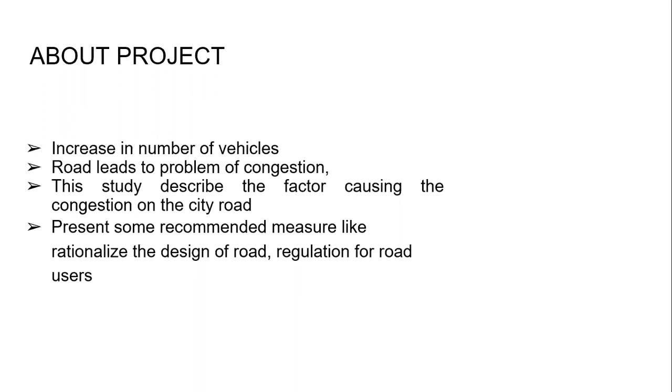This project first studies the factors causing congestion on the city road and recommends measures, providing some suitable design and road user regulations.

Next topic, minimizing the traffic by suggesting ring roads.

The high traffic volume is the main source of congestion in the cities, which is a big problem on the transportation system. This may lead to various types of pollution such as noise and air pollution, which may affect the quality of life. Also, there will be a big number of vehicle conflicts, which will affect the performance of the transportation system. To reduce the traffic volume, ring road construction is suggested.

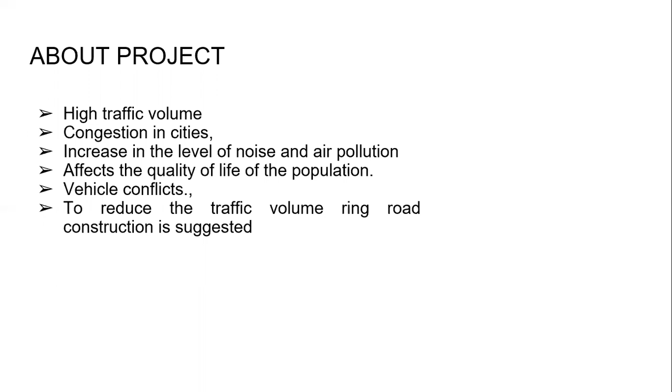Next topic, intelligent parking system.

Urbanization, industries, increase in population, slow-paced city development, and mismanagement of parking lead to parking-related problems. There arises a need for a secure, intelligent, efficient facility guidance towards the parking facility with proper management.

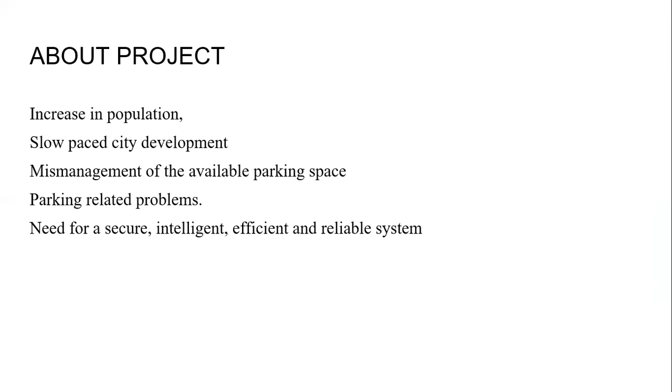And here it comes, the intelligent parking service, which is a part of the intelligent transportation system.

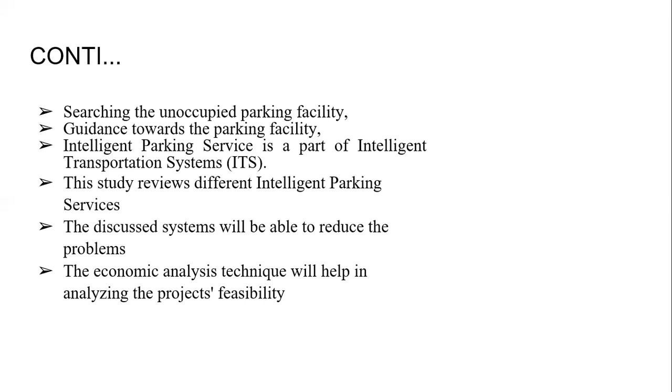In this project, we review different intelligent parking services for parking guidance and their management. The discussed system will be able to reduce the problem of parking and provide efficient parking. We also do economic analysis, which will help in analyzing the method's feasibility.

Next topic is analysis of excavated soil in PLAXIS 2D.

The load at which the shear failure of the soil occurs is called the ultimate bearing capacity of the foundation. The bearing capacity of the foundation is a primary concern in the field of foundation engineering.

In this study, we will develop a model using PLAXIS.

Finite element analysis will be done using the Mohr-Coulomb failure criteria and represented in a two-dimensional soil model. The foundation is modeled as a square footing and load increment is applied till the soil model fails.

The ultimate bearing capacity of the soil is identified, along with the minimum pressure at which shear failure occurs. Stress distribution and displacement are also identified. Effective stress is considered as bearing capacity in PLAXIS.

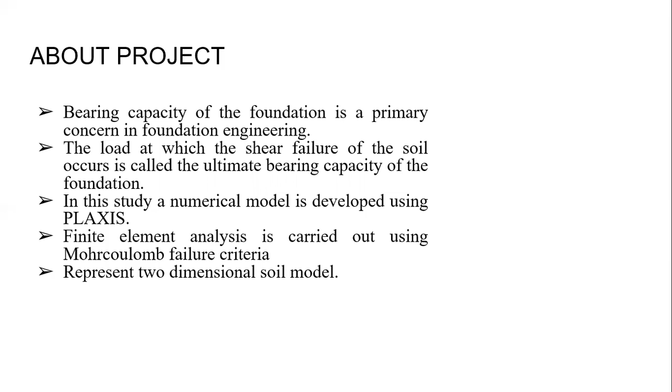Next topic is seismic analysis of confined masonry building and RCC building.

Several damages are reported due to unreinforced structures, which leads to the need for development of other options for the regular RCC frame structure, such as confined masonry structure.

In this project, we discuss the confined masonry building and compare it with an equivalent RCC frame. The buildings are compared based on base shear, story drift, lateral displacement, etc.

Here, analysis is done using analysis software, such as ETABS, etc.